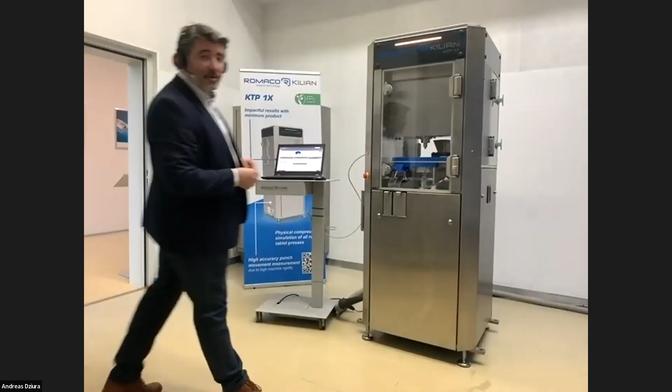Adelante, Víctor. Hola, muy buenas tardes. Soy Víctor Antúnez. Gracias, Rubén, por la presentación. Estoy aquí con nuestra doctora de farmacia, la licenciada Carola Handel, que nos va a hacer una pequeña introducción a nuestra herramienta de desarrollo, la KTP 1X que tenemos aquí expuesta. Como había dicho, yo soy Víctor Antunes de ROMACO. Algunos de los participantes ya me conocen. Para los demás, yo trabajo en ROMACO hace mucho tiempo. Actualmente soy responsable por la línea de ROMACO, es decir, de la parte de granulación hasta fin de línea para el mercado mexicano. Tengo el placer de estar aquí hoy con Carola para hacer la presentación de la KTP 1X, que es nuestra más reciente máquina de desarrollo que presentamos a ustedes. Esta será la primera vez que la presentamos en México.

Seguimos adelante con la presentación. De una cierta edad necesitamos de gafas, con permiso. Ahora tenemos aquí la presentación que va a empezar a explicarles la doctora Carola Andan. Adelante. Carola, bienvenida. Nada más les recuerdo, los que quieran ir viendo los subtítulos de lo que se está hablando, activan el botón de mostrar subtítulos, le ponen la parte inglés y va transcribiendo lo que está comentando la doctora Carola.

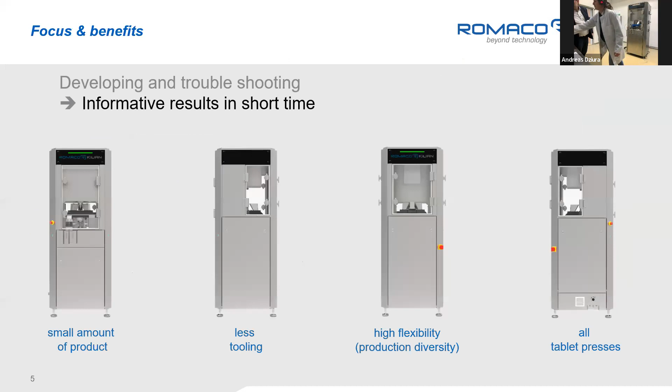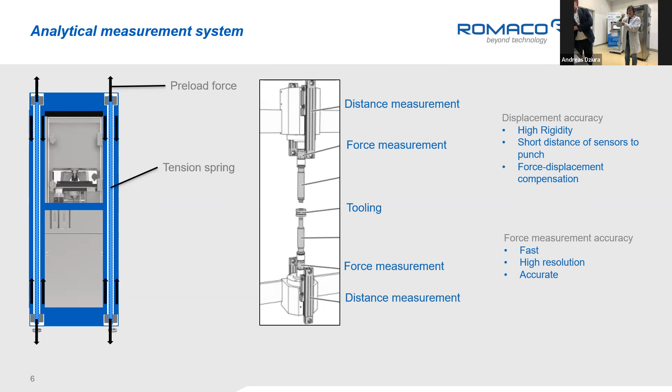So why is the KTP 1X such a really good tool for analytical measurement? Because we've got a really stiff machine, a very stiff concept, so we can have a really accurate and precise distance measurement. It's right at the beginning of the process, in the middle, where the distance measurement system is mounted, and we are very precise and accurate due to the stiffness of the frame of the machine.

But I don't want to talk so much about the machine and how it's constructed. I'd like to show you how easy it is to use and how easy we can handle the machine in the software. The software is called ArtVision, and it's very intuitive. So we'd like to have a closer look at the machine, then I can explain how it works.

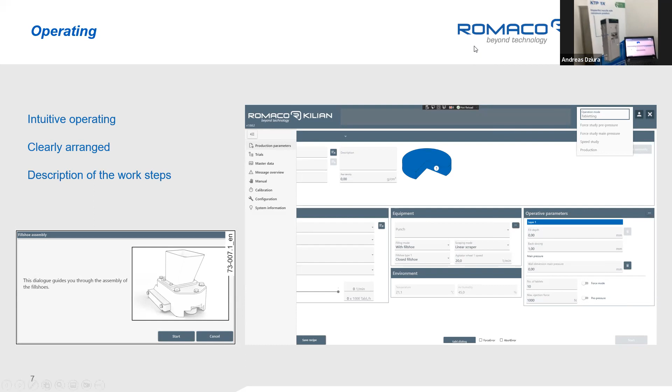So this is how you set up, or how you start with the formulation. The first step is you choose which application you would like to work on - you can choose mono layer, bi-layer, tri-layer, or tab-in-tab even. The next step, when you set up your product, you go into the profiles.

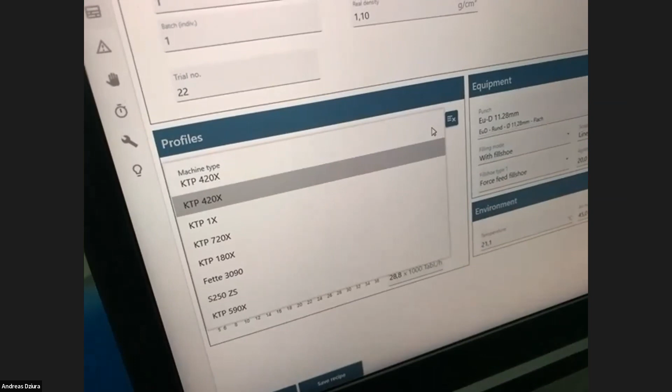That's the machine you would like to simulate, for example. This is not just limited to Kilian tablet presses - we can do any tablet press which is available. We just need certain parameters, and then we can set that up. So we choose now the KTP 420X. We can choose which punch we would like to use, and we have now chosen the EuroD punch head.

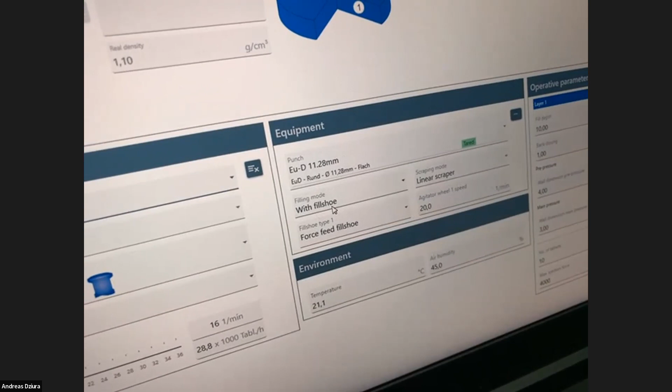The next block you have to fill in is how the equipment is chosen, and I'd like to go for a EuroD 11.28 millimeter punch, and I'd like to have the fill shoe. If I had a very tiny amount, I could do manual filling as well, but we would like to produce a little bit more, and we've got a very good free-flowing placebo inside the fill shoe, so this is not a problem, and we'd like to show you how the fill shoe operates as well.

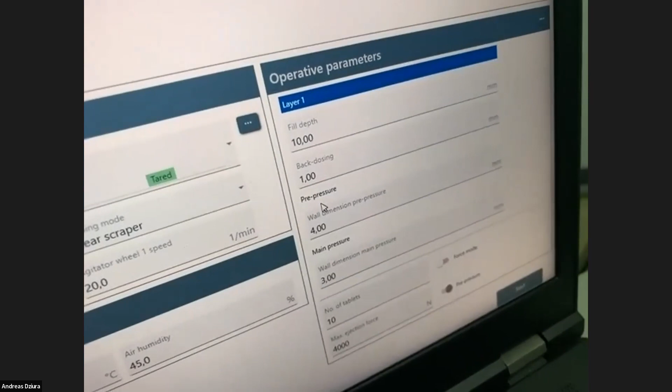So the last and very important part is the operative parameters. You set here the fill depth, and you set if you would like to have a pre-pressure and a main pressure, and you set the wall dimension, and this corresponds with the force.

But nevertheless, I don't want to talk too much. I'd like to show you how the machine makes tablets. So we go and start it.

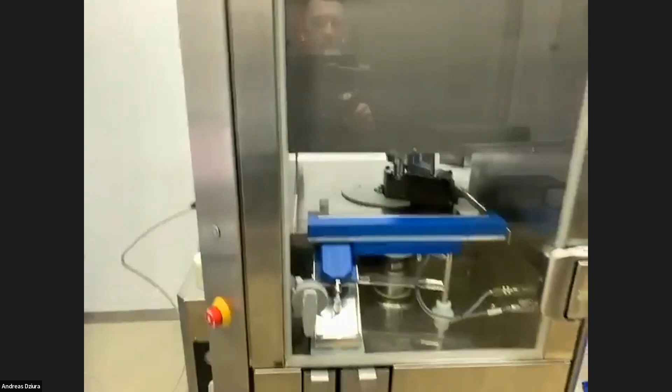So you can see the fill shoe fills. Then we've got a pre-pressure and a main pressure applied, and then the linear scraper scrapes the tablet off, and it falls then into this.

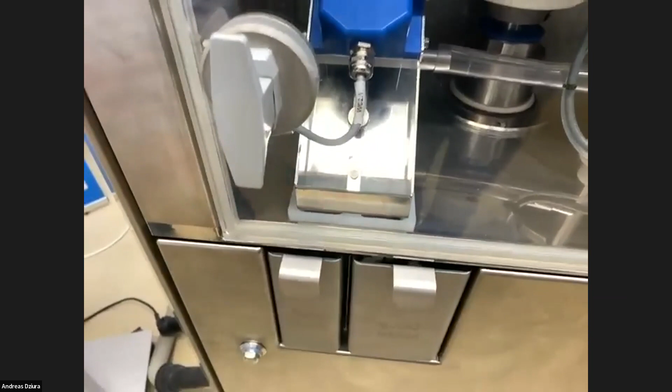And during tableting, the machine saves everything automatically. You can see the real filling, the real pre-pressure with the wall dimension, and the real main compression force. Additionally, you see here the ejection forces as well.

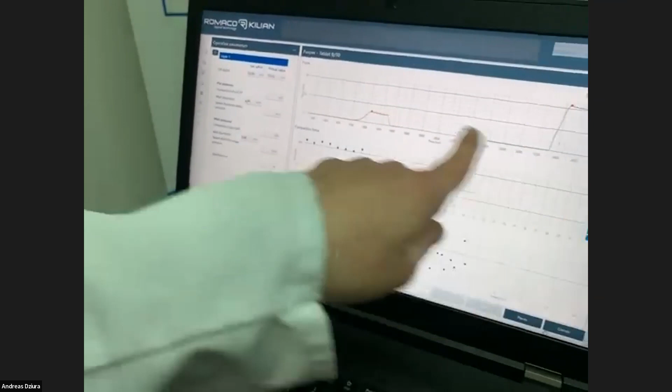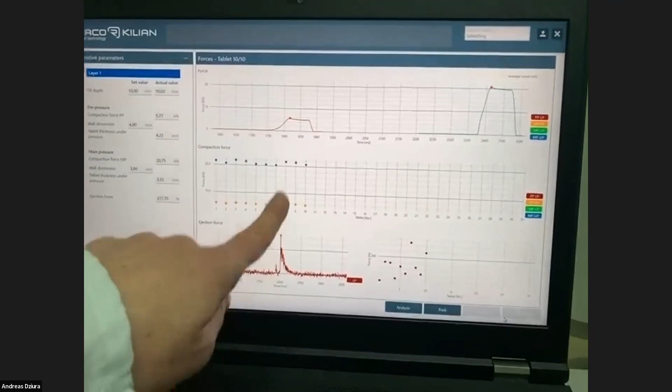So here's the force-time profile of the KTP 420X which we chose. Here you can see the pre and the main pressure, and this little red dot shows this, and this, and this is all corresponding. This is from tablet number 10, all values, and this is all ejection forces collected.

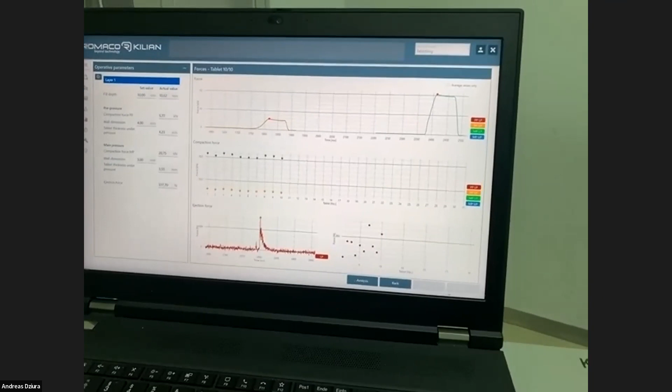So the next step would be to go into the analysis, and then we see all parameters like the mean pre-compression force, the mean main compression force, and ejection force.

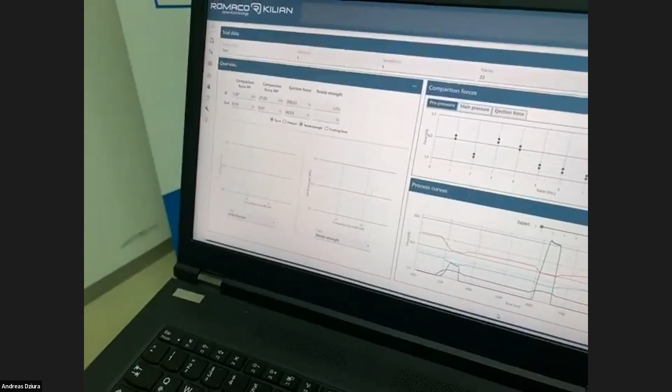And if I had gone straight with my tablets, I would have collected them and put them onto a device which measures the weight and the crushing force. Then I would have the tensile strength calculated by the machine as well.

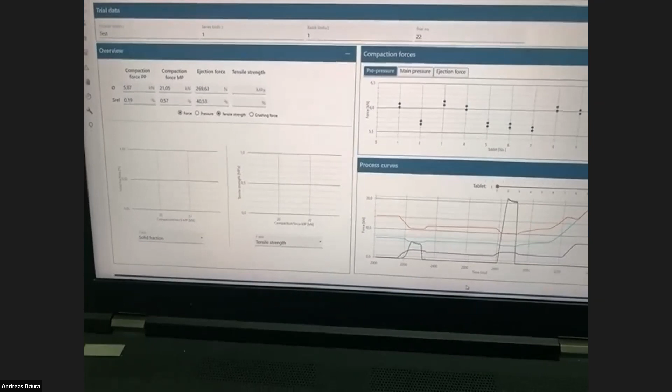And I would have these diagrams like the tabletability plot, compressibility and compactability plots, solid fraction, compaction force, and tensile strength compaction force diagram. So it's a very nice overview of the tableting process.

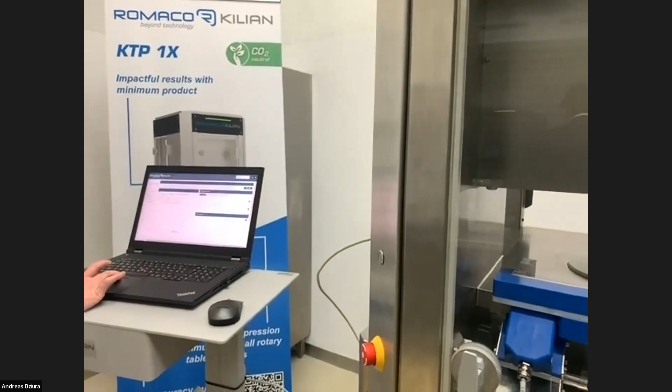But we go back to the presentation, because I've prepared how - yeah, this is just what we saw. We saw it in real. I don't have to talk about it, but it's very easy to read. It's very accurate, and you can see very fast the resulting parameters.

This is the analysis of the data I just showed you as well, but here we prepared the weight and the tensile strength already. But this is just normal plain tableting.

If you would like to characterize your formulation, which gives you a lot of information on how you have to apply a certain force in order to get a certain crushing force of your tablets, you would make a force study. So we can make either a force study of the main pressure, which I prepared here, or we can make a study of the pre-pressure as well.

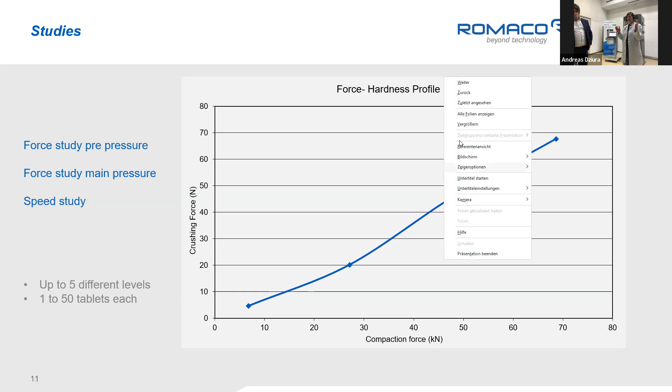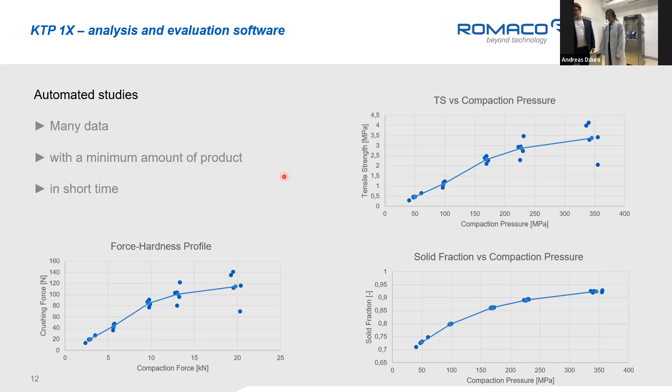So this is the data you saw on the screen as well. We have loads of automated studies already set up in this system, so you don't have to calculate or set it up yourself. Just feed in the weight, the crushing force, and the height of the tablets, and it's done. You've got your force hardness profile, tensile strength compaction pressure, and the solid fraction compaction pressure profile in a very short time.

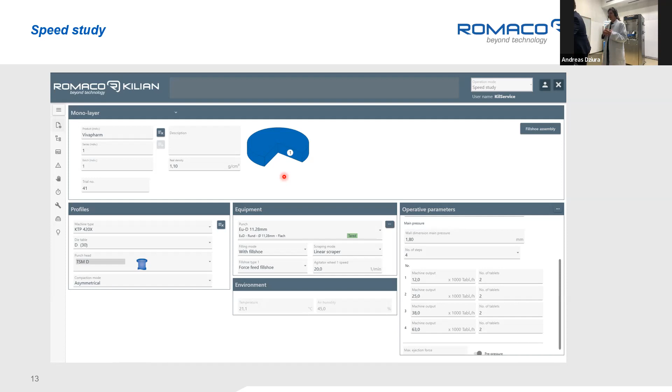The next study, most important for customers, is how fast you can run the machine. It's important to know how much force you need, but it's always very interesting how fast you can tablet at the end of the day. So we can make a speed study, applying a few tablet speeds like 12,000 tablets per hour and so on, at different levels, and at the end we get the speed study diagram.

We see, for example, with this formulation, that we don't have a decrease in crushing force of the tablets with increasing speed. So this is a very stable formulation, and we can run it as fast as 50,000, 60,000 tablets per hour and it's still stable.

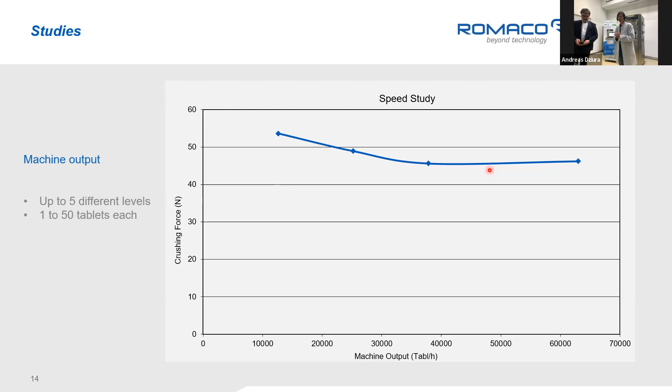So more or less, this is everything you need to know for going from a very tiny amount of product to the big machines. You've got the fill depth, the pre and main compression roll height, so you know the forces you need and how fast you can run to get really good quality tablets. Scale up is no problem anymore with this machine.

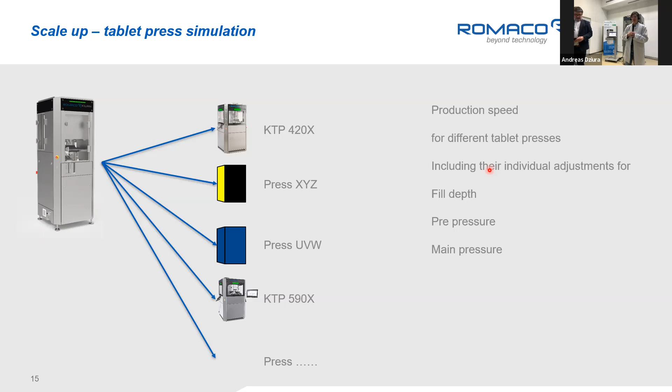Another outstanding feature of this machine is that we don't have to store the data manually. We just do our job, and it stores everything automatically. No worries about forgetting to save anything. It's always there, so you don't waste time waiting for a storage process.

A very handy thing as well: you can work on the machine while your colleague goes to the office with the previous test data, and analyzes it there, while you still keep working on the machine. So this is a very fast and effective way of dealing with loads of data.

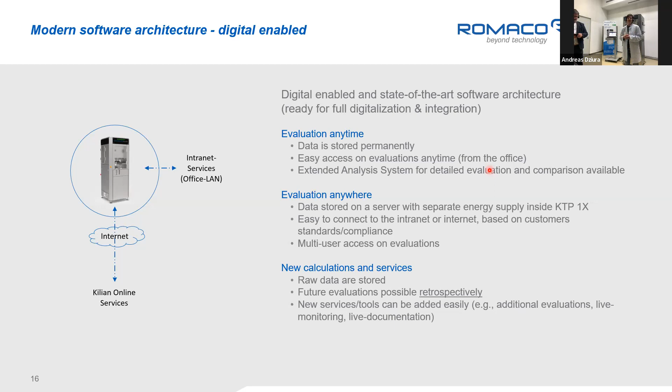Nice thing is, because every piece of data is stored in this machine, you can easily go back in the data management system. You can compare trials and easily select what to compare. You can browse and search — it's a web-based, easy system. We call it the extended analysis system because it's very easy to handle this data.

I've been a little bit in a rush here, I think I went very fast. Sorry for that, because we had a little trouble with this presentation. But if you have any questions, we are happy to answer them.

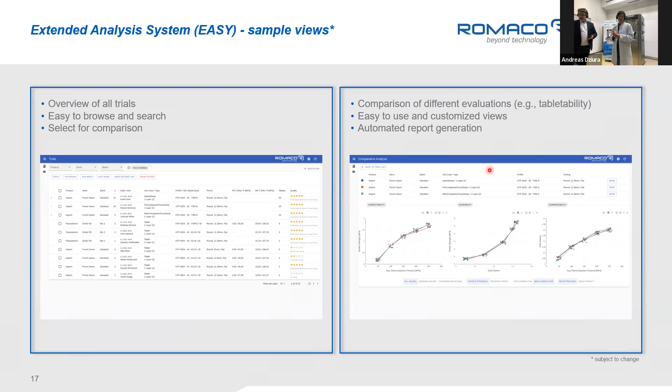So I would say thank you. Oh, because I haven't finished yet — I've got a little one, the summary.

So why should this machine be in every R&D lab? Very easy, because we don't need a lot of product in order to get a maximum of information — I really love this machine. The other thing is you don't need a huge room to set it up, because it has a very small footprint, and it fits through nearly all doors.

Also, you don't have to clean much, because the process room is very small. And another handy thing is you just have one set of tooling, which is much easier to clean than, say, 30 sets of tools and dies. If you're at the beginning of formulation work and not sure which tooling you'd like to go for, you just buy one other punch set, and you can easily change the tools without doing this for a long time, because it's just one part of tooling.

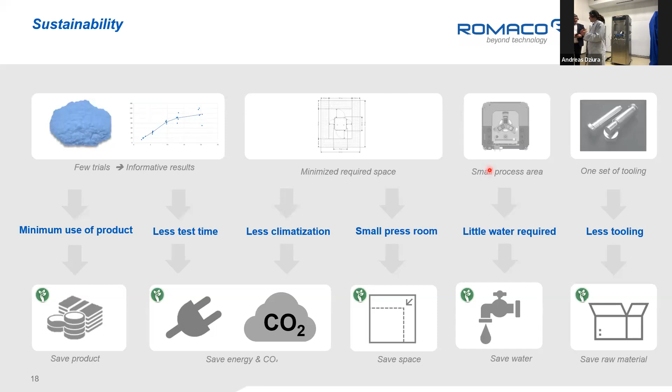So this is the summary, and I'm at the end of this. Thank you very much for your interest, and if you've got questions, I'm happy to hear from you.

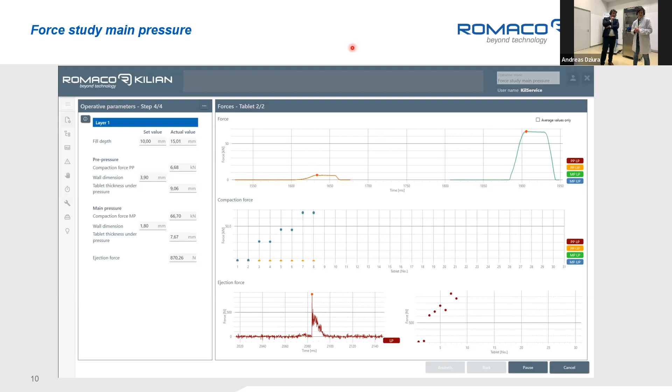Yeah. Thank you, Carola. Fully true. Okay.